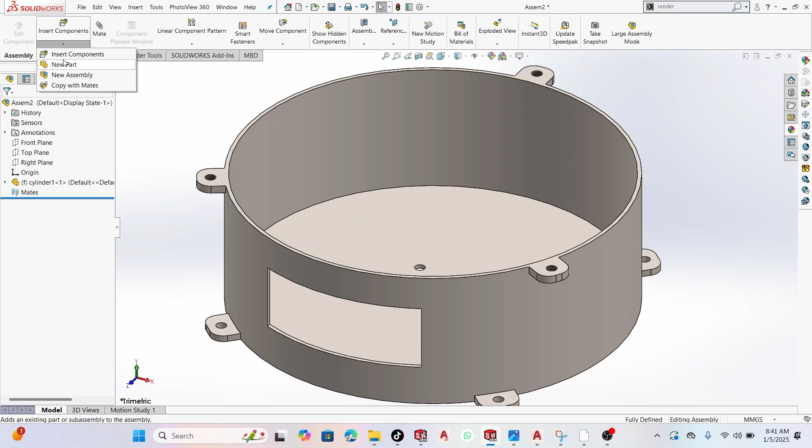Let me start with this one. So this is the bottom piece of the cylinder, and I'll come here still, insert another component.

Let me bring in this bearing. So I'll add a mate. This mate will be concentric mate, and for this case this will also be concentric. However, I have to make sure to put in coincident, just like that.

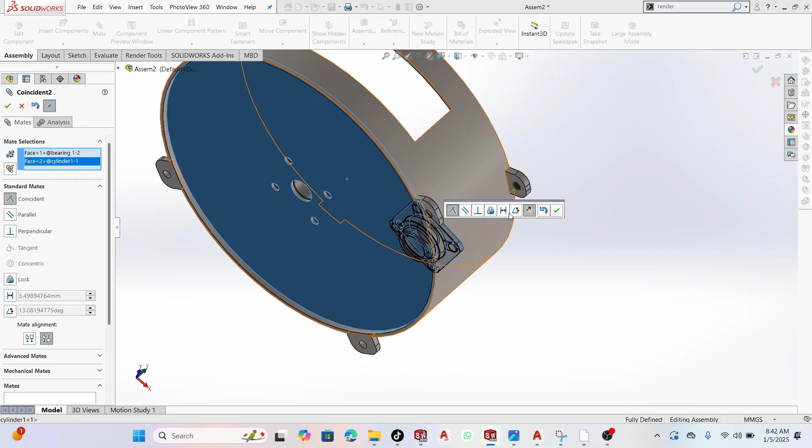Having done this, I'll do the same also and add the bottom bearing. Note I can basically just press Ctrl, then I get a copy of that component. I'll first rotate this and turn it upside down, then repeat the same mates that I applied this time around, going down. So first coincident, then I make this concentric, and finally I'll do the same, so that part like that.

Having done this, next part will be bringing the rotor. So I'll come here and insert the rotor. Remember how these parts have been created in the previous videos, so feel free to roll back and look at them.

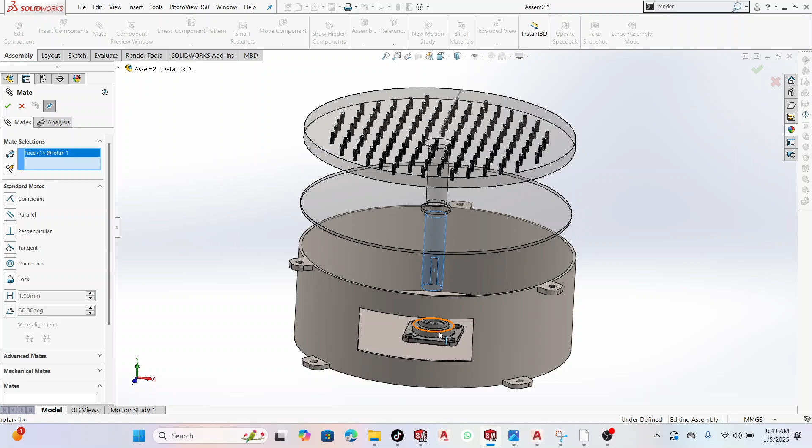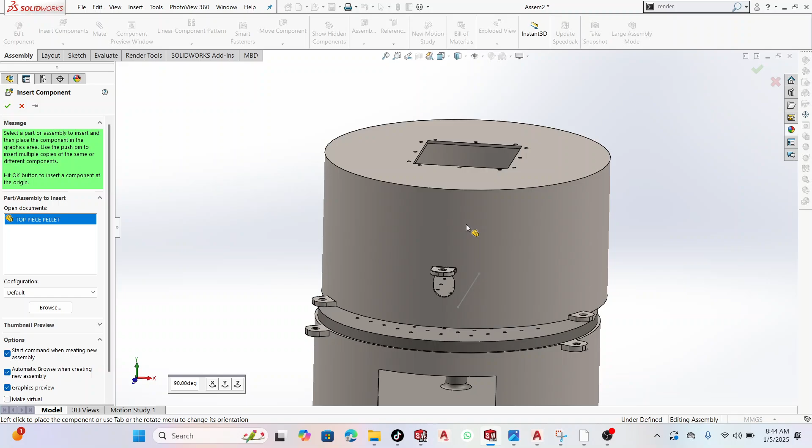Next part is going to be bringing in the top cylinder. This is it. And I'll make sure that this, actually you can first make it concentric to the lower one, just like that.

See, so also do this, and the final part will be making that, and then finished it. I think that's where we are. So far so good, we've moved on well.

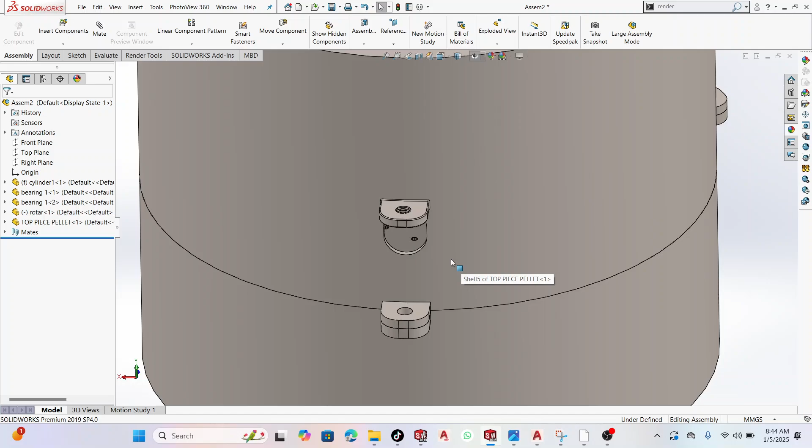So my next part is going to be inserting the rollers. The rollers are made of two different components. You have that.

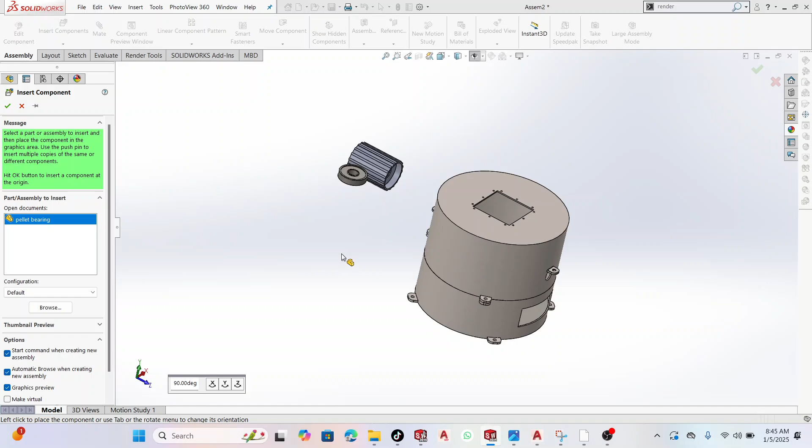We have bearing, I think it's called, it's this one, pellet bearing. Then also have a shaft.

So please follow along as I'm doing this assembly, and your task will be to reproduce the same thing. So this is a pellet shaft.

So what I'm going to do basically is assemble these items so that we have what is called a complete setup.

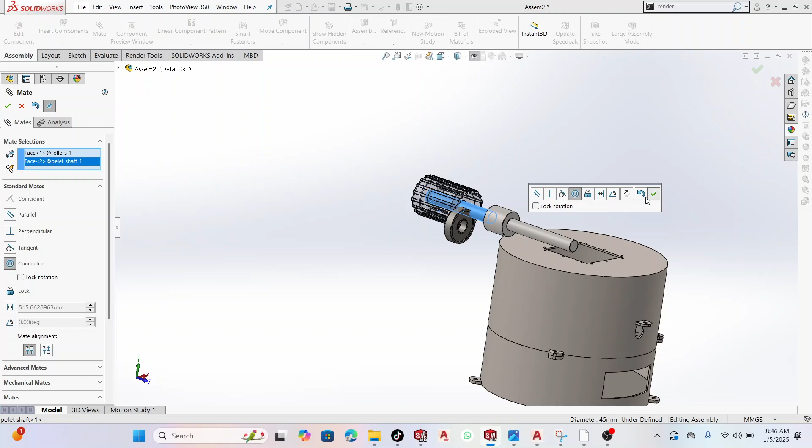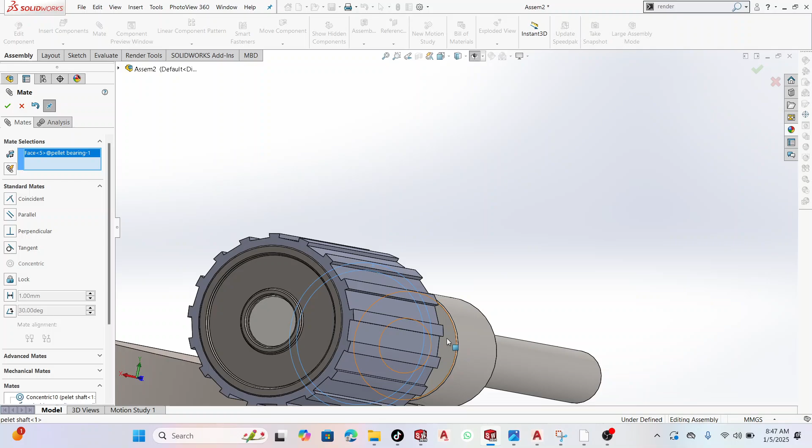We made this also. Then make this and that to be coincident, like that. And to take out this bearing, just press Ctrl. So you do the same. Do that, and also make sure that this face and that face are coincident, and finally make this and that face to be coincident.

So what I'm going to do, to select that, that, then so from here I can copy these items. See, you have so many options, so many options.

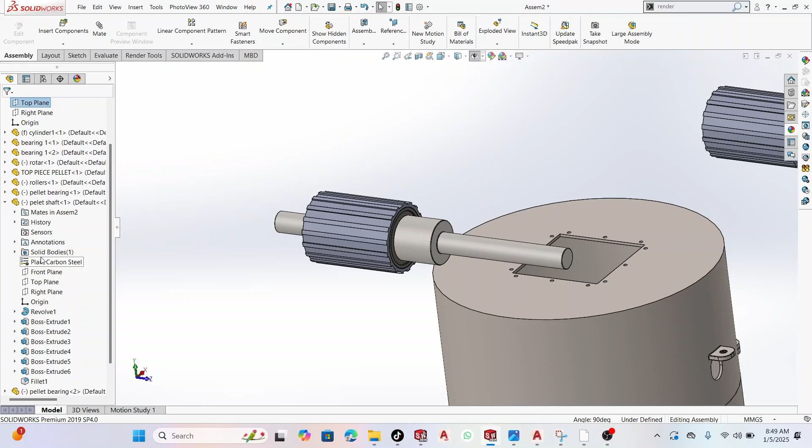No, let me just do this, much as I could also do a mirror. Assuming I go to the shaft, this is it. Yeah, so the front is kind of meaning I would need to create a plane around here, which I don't want to do.

So what I'm going to do, let me just get these pieces very fast, just by dragging. Press Ctrl, then drag, Ctrl, then drag. So I've gotten a copy already, the items that I need.

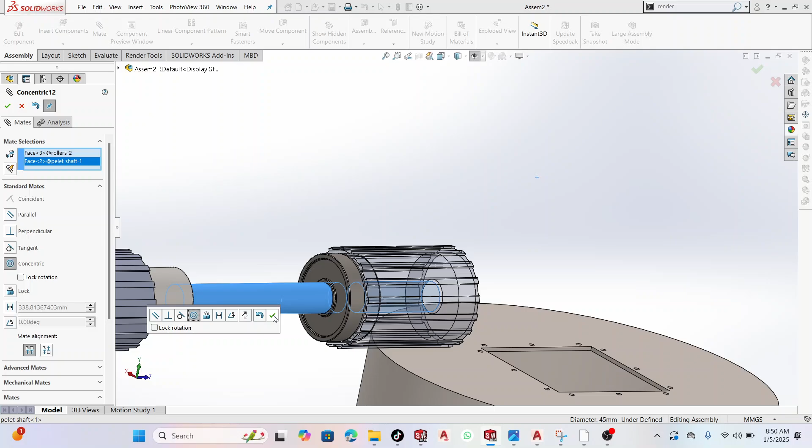So I'll repeat the same thing and do that, concentric, and do this and that. So concentric, need this to be concentric to that. Then before I make the final coincident mate, first do that, then I'll make this to be coincident to that.

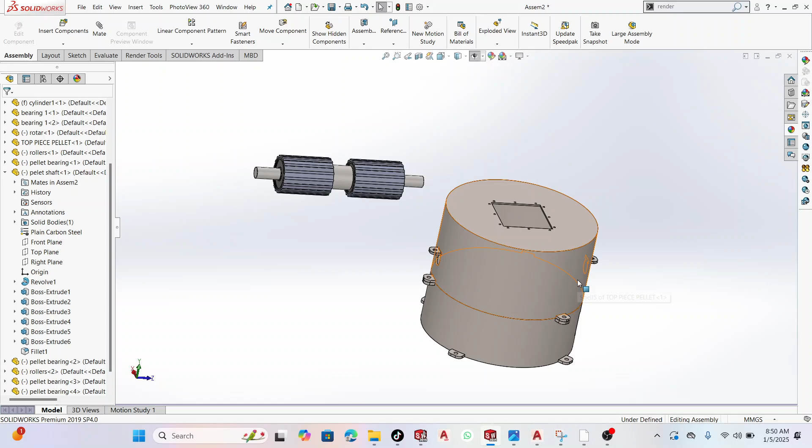Like that, and finally I'll make this and that concentric, then make this and that. So that is the assembly of our milling rollers. However, the other would also be doing a separate pre-assembly so that when you come this side, you just fit it in. So I can drag this in, or just decide to.

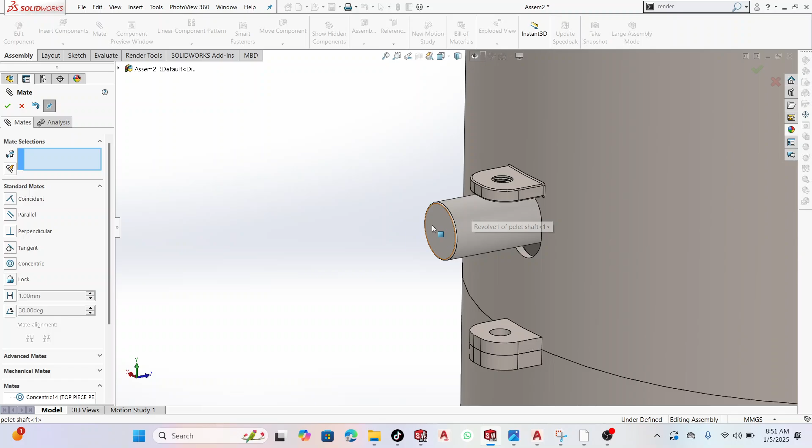So there are two options. You can either make that entry, or the other mate is this. Set it off like that. So that is where we are.

So I'll be putting nuts here. Actually, it will be a bolt. As you tighten it, you'll be adjusting that height. So far so good. Just look at the inside of this. Yeah, this is what you have, what you're having.

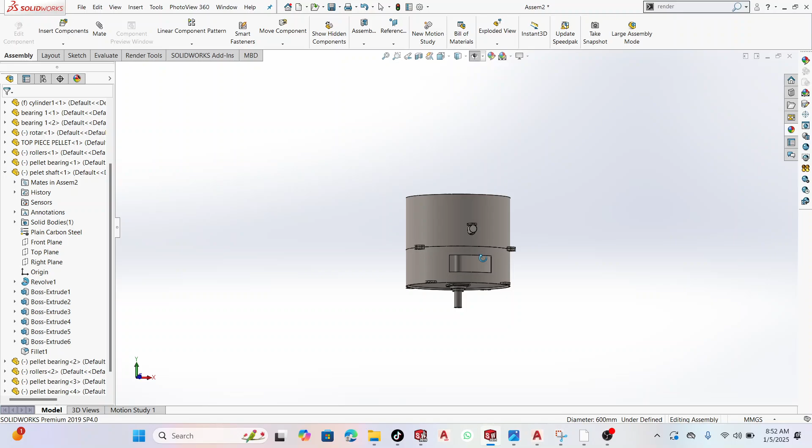So having done this, allow me to bring in the frame. Let's come here, set the frame. This is it.

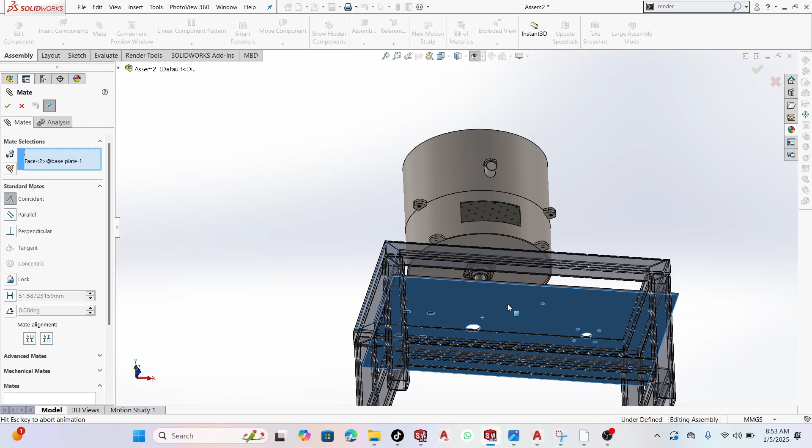So SolidWorks is so beautiful. It has an infinite workspace as long as you don't forget what you're doing. So this is the base plate, and I'll first do a mate for these two. So this is where we are.

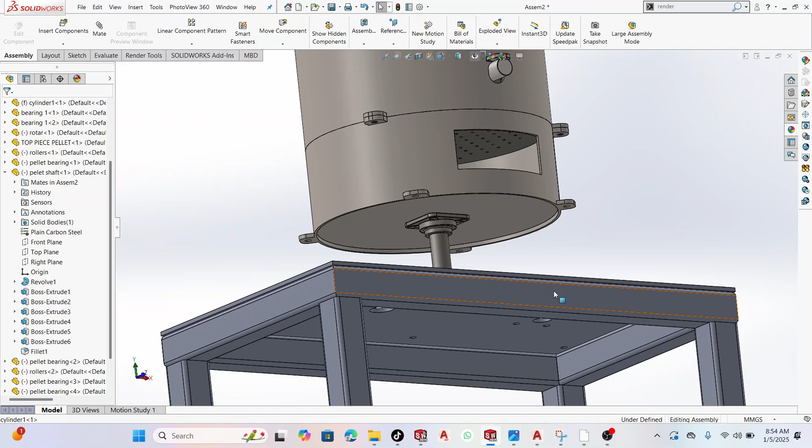So having reached this level, I realize that here this bearing is already here. So what we can do, we can just put it up and down. By that I mean, instead of having it here, I just put it under this. It will be supported already. So come, first delete it. However, that would also break the mate straight away. But yeah, let me just do that for now.

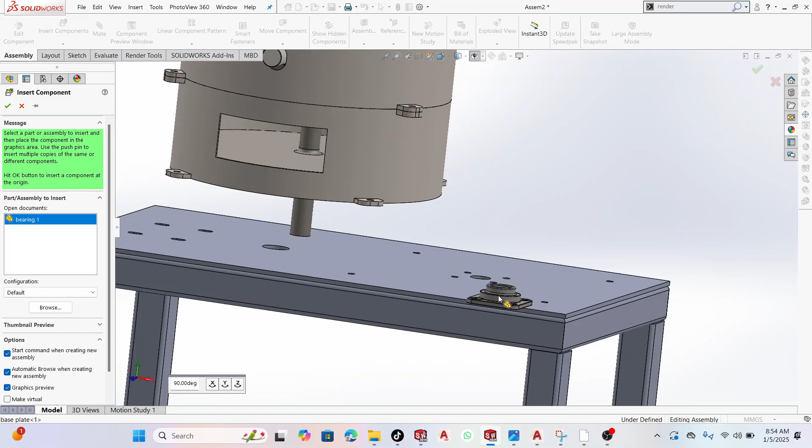Remember, I could also just drag out one piece. So I'm going to do this. I'll make this and that, now I make that coincident to that. And I will bring out this. Concentric.

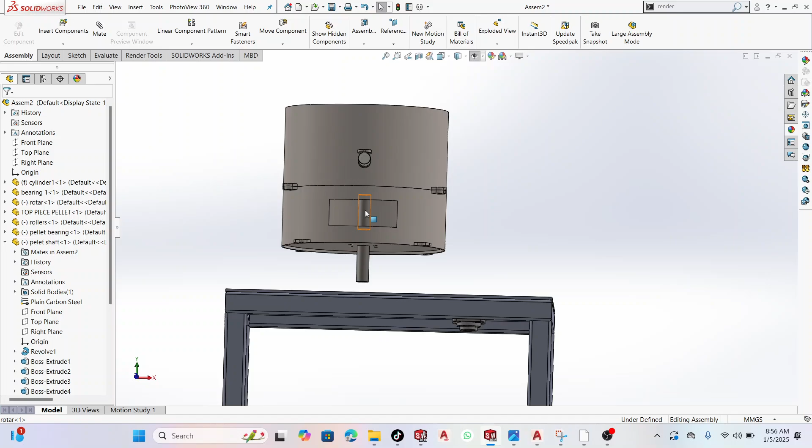Okay, so I need to look at this. Just get one moment. Just look this and that, so that they move together. Just come, that. There we are. So follow this to that. Yeah, so make that command.

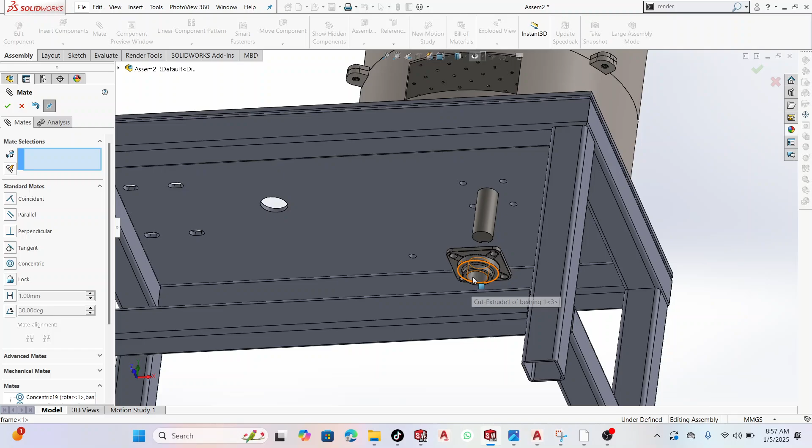Actually, make this and that. Yeah, so there we are. Bearing down, bearing inside, so a piece can freely rotate. Yeah, so these are already locked also to place. So I think so far so good.

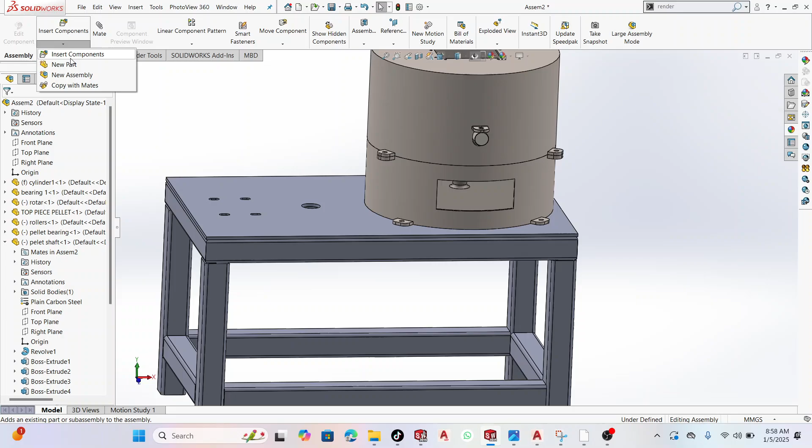Yeah, the next assembly is going to be about the motor and its parts. So I'll come here and insert motor mount. This is it. So please go and watch those parts. The names may be different a bit, but same concept. So there we are.

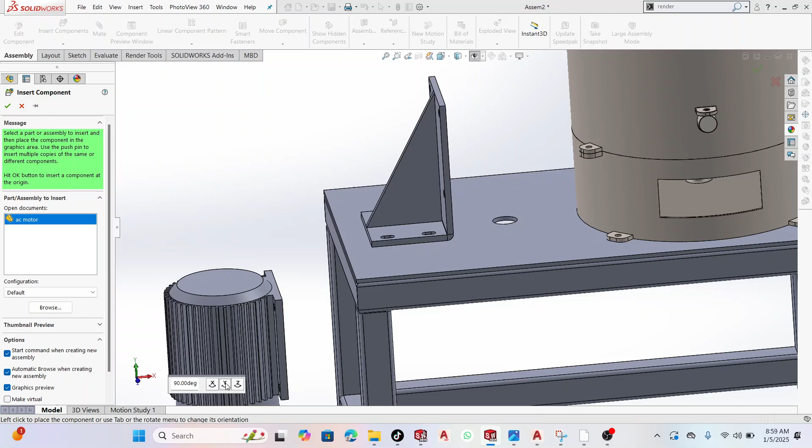Insert the motor also. This is it. Let's change the direction, it faces down. Then carry it there like that. So I want to make it coincident to that. So do this. Yeah, so there we are.

So far we have moved very well. I haven't got any kind of issues.

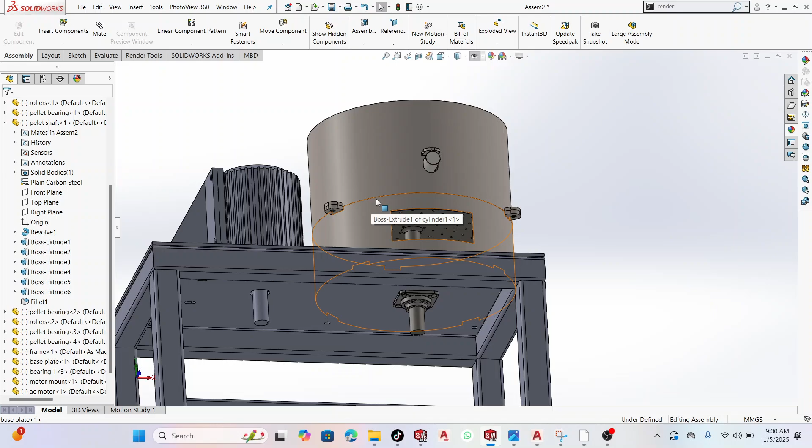So the other part is going to be to open the outlet, then finally I'll do the pulleys.

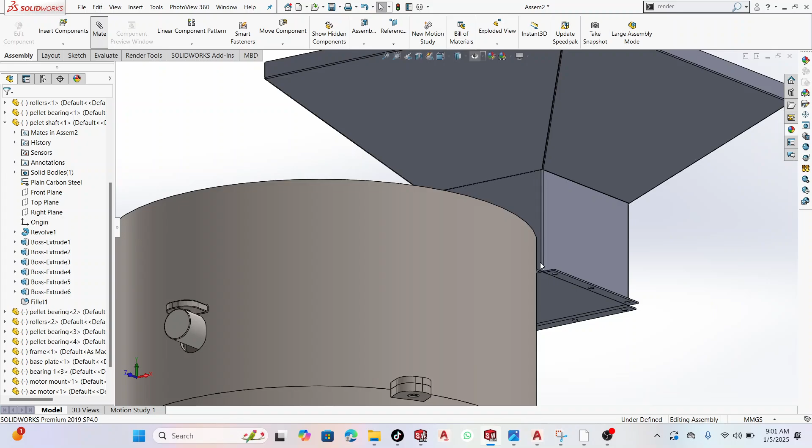Okay, it's going to that. So put the hopper, two steps, going to be the outlet. Yeah, I'm going to put the outlet here.

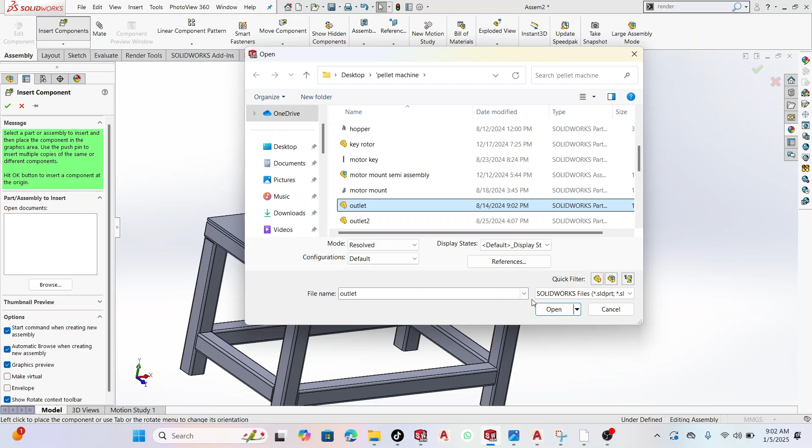So I made a sample of them because I was looking at different styles. So it's this one. Yeah, so remember I've not included it in my tutorial, but given the dimensions.

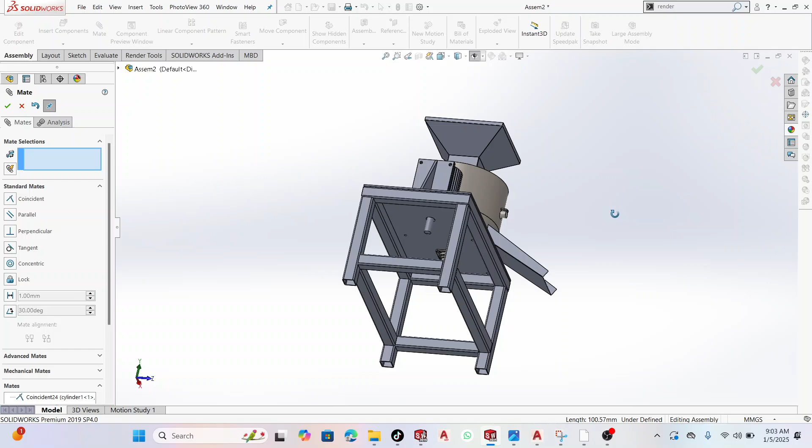First try this, to match that to the vertical. See how it comes out. So basically this will be done by welding. Let me see if I do that and that. It's coming out well. I made this and that.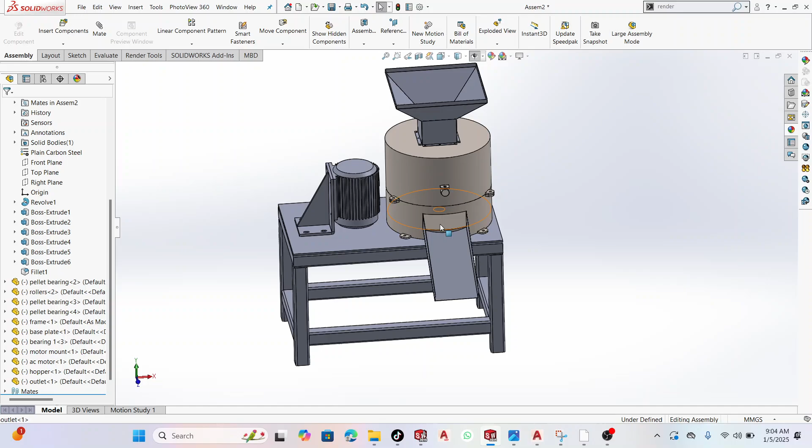So this is a picture. Probably I would have defined it better. So I realized it's lacking a bit, because if you look at this corner, the line is coincident. However, this is kind of, yeah, so regardless, this is normally welded here for the purpose. So for now, I'll keep it at this. However, I'll have to recheck it and see where I could possibly rectify. Thank you so much.

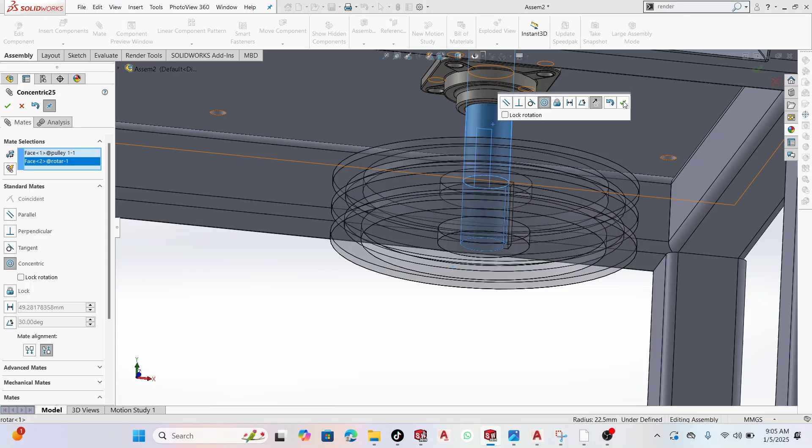So I'll go to the pulleys, and straight away, let me see, have the belt, but pulley one. Yeah, so this one is the one for the motor. First leave it at that, then I'll insert other pulley, pulley 2. This will be the driver.

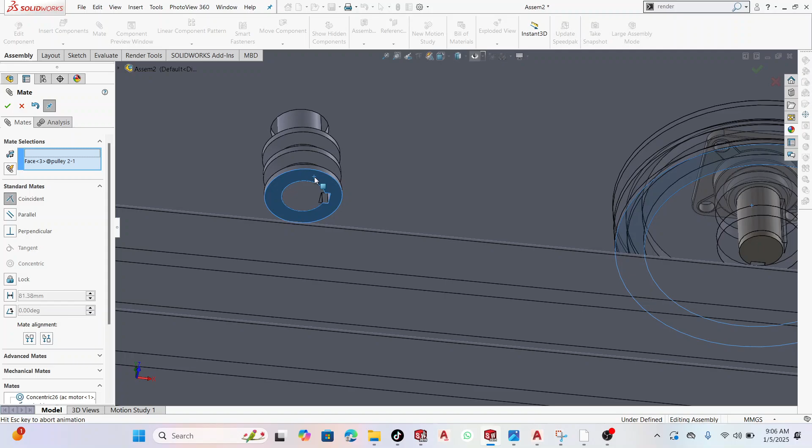So here we are. What I'm going to do is make this face go into that, because they have to be aligned. Yeah, they have to be aligned. Other parts also, for me to do the simulation.

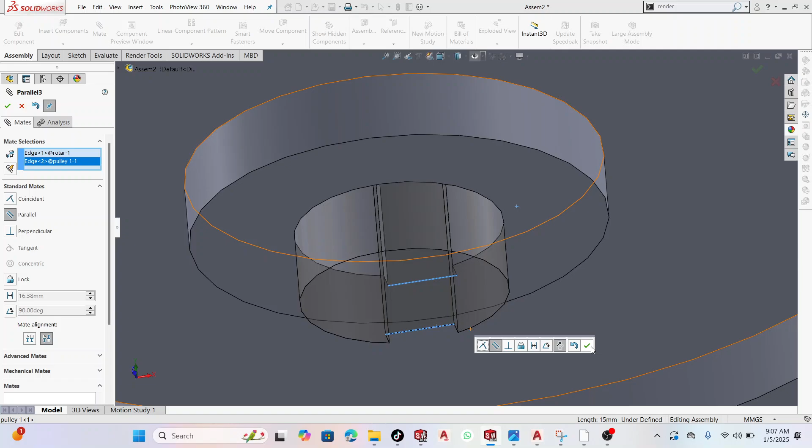I won't first put the keys there, because at the end of the day, this one has no issue. Yes, there's no issue. You can have its lock in there.

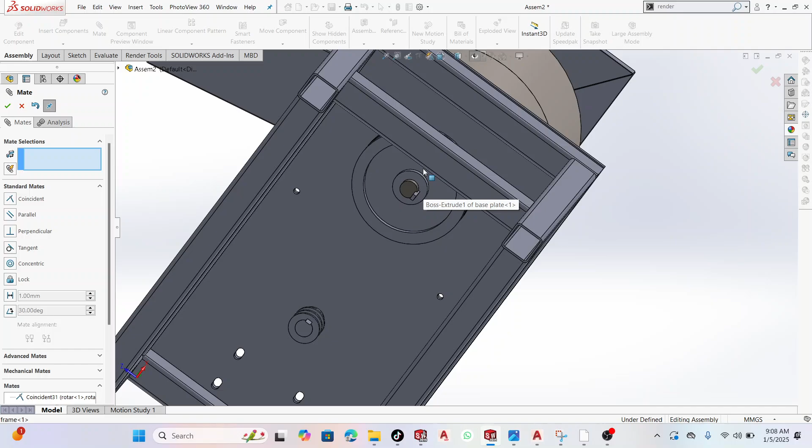Because this will be moving a single object, however, for this case, the reason why I have not locked it as such is because we shall have a key interfering with the movement of the animation. But for that purpose, the key also would come and be inserted in there. So there we are.

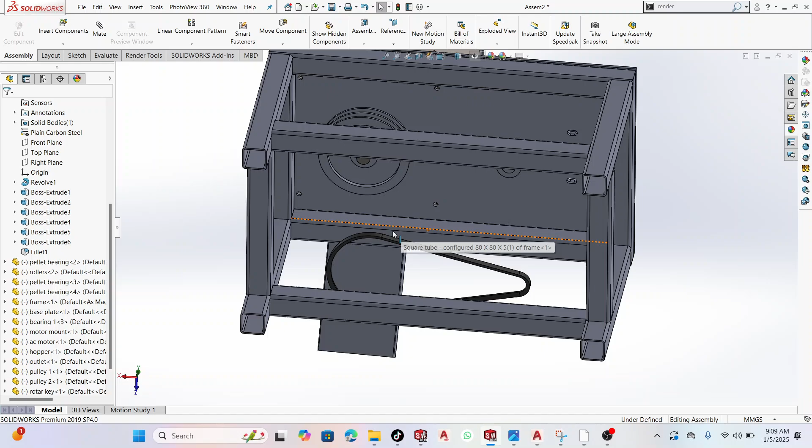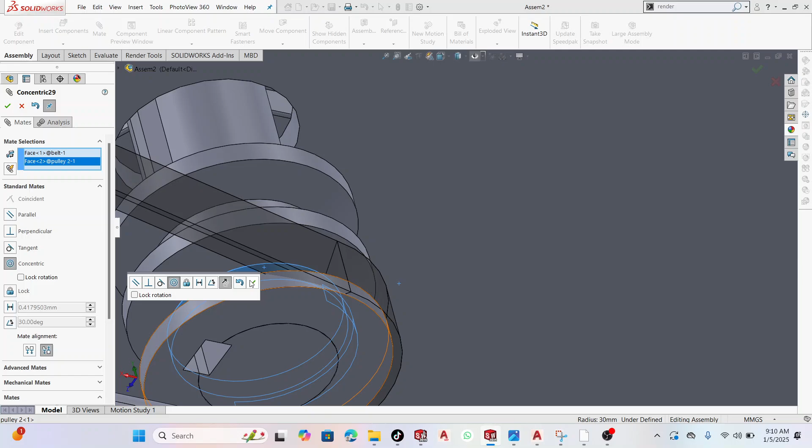Accept. Right. I could... that would come there like that. However, it's still lagging a bit. Let me move it around.

Now that would come with adjustments in the top part of the motor to get the best position. But that is the picture. So, having reached this stage,

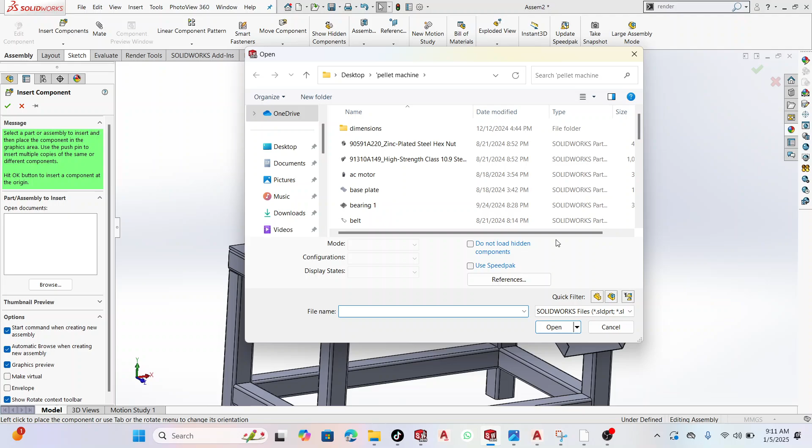I'm going to try to put in the bolts. So in the tools, this is it. The design library can have the toolbox, where you can have at least some basic bolts added. However, if you find that your nuts and bolts are not to the required standard, what you can do is basically download them.

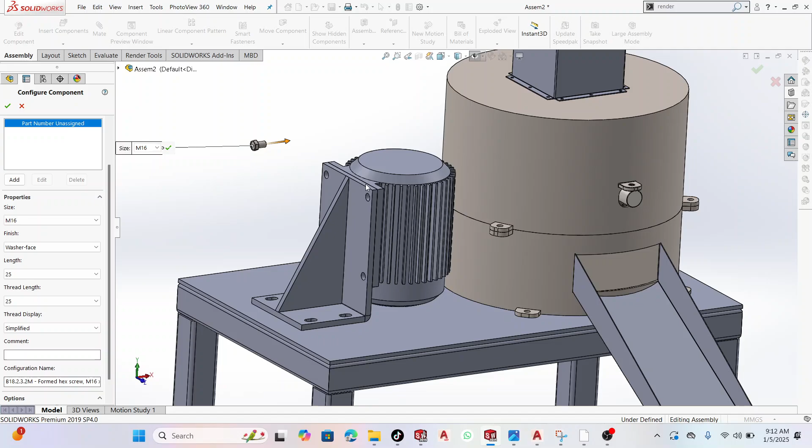You can see simplified threads. You can have M16s, you can have everything here readjusted. So I think these were M16s, and in one of my videos I showed you guys how you can download some of these pieces using McMaster. So I can confirm here very fast on the size. It's 20 mm. So let me see if in my design library I have a bolt that can reach 20 mm. So assuming I select that,

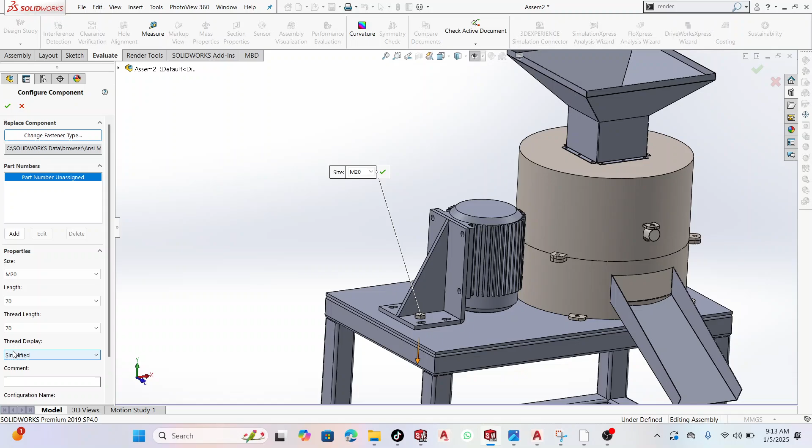I try to bring it there. Yes, I can have M20, and I can have adjustment in the length. Try 70. Let go through. However it's a bit lengthy. Let me... yeah, I think that's fair enough.

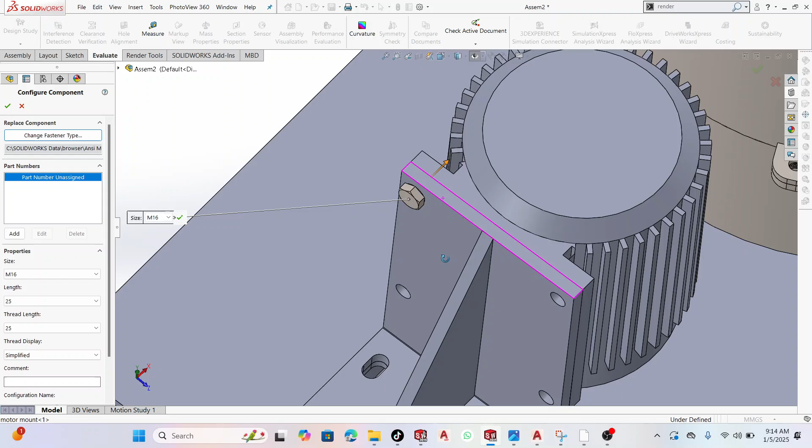So remember, let me first delete it. So I'm going to insert it again. Close this one, this time around. I want it there. So we are going to adjust everything according to that length. See, it has come out.

So let me make it 50, so it doesn't have to touch my motor. And also I can have it schematic like that. So this is a perfect one. And having done that, all I need to do is to just come and keep.

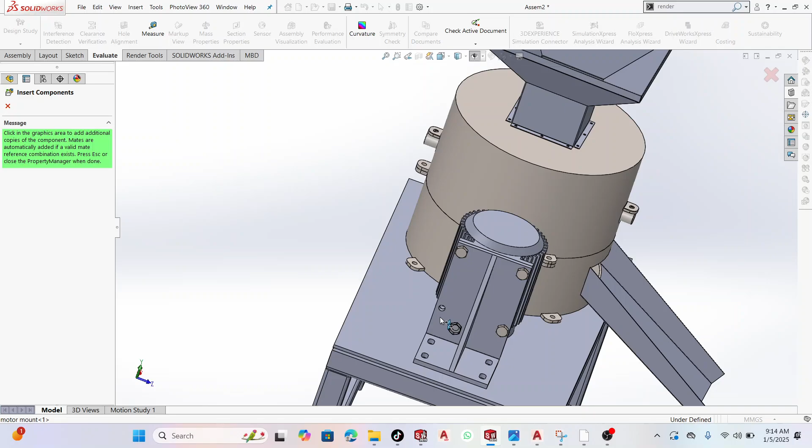So also do the same here. However, these will be slightly longer. So this is it.

Confirming this, these are 16, so I'll do the same thing. Come here, these are 16s. So it's there, however it is far.

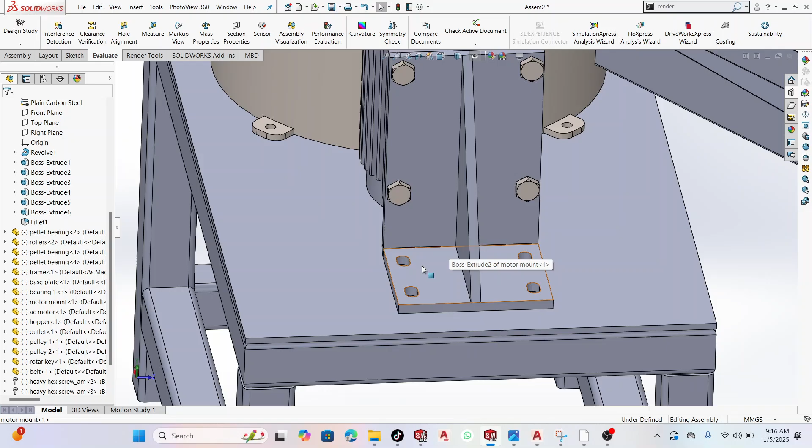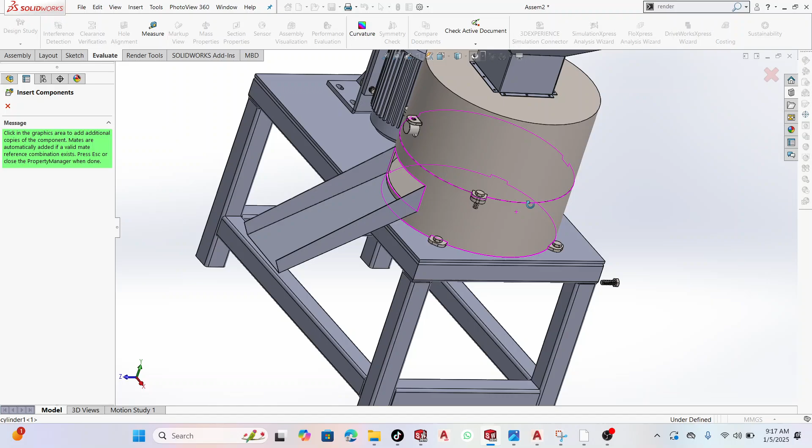So say okay, then I come there, there. I think even this. So everything is coming out just as nice and as simple. I'm positioned to automatically sense the hole, like that.

So you can also add washers. Yeah, so it has been covered very well. Oh, however, I forgot this. So do a control, then control, drag and drop.

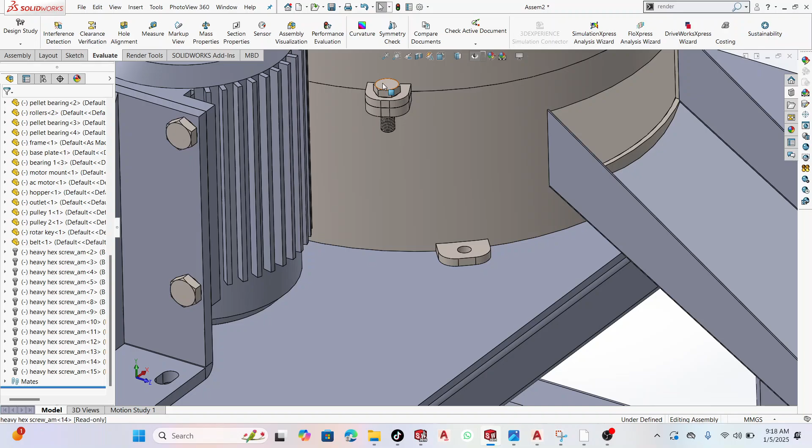Remember for this, they're supposed to be shorter than that because they're adjusting that overall height. Take away this, delete it. So I'm going to fill in the M10s for now, since that's what I had calculated here.

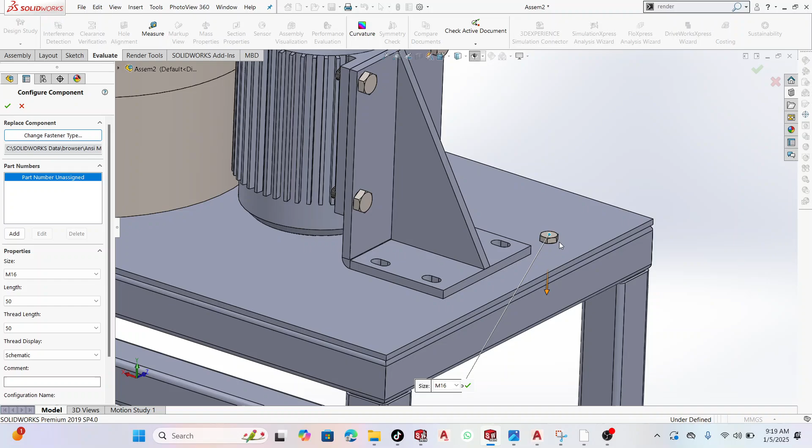The smallest I have is M12. For the concept, I'll show you how it works, but it doesn't differ from what we had before.

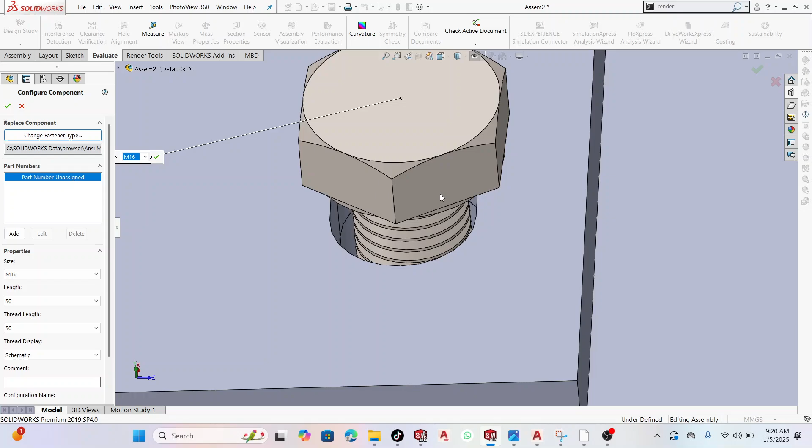It's long enough. Surprisingly, I'm seeing something. It's like this is M20 actually. You know why one side is smaller? But yeah, it is M20. See?

So I want to do M20. I want to leave the thread schematic, that, and I will say okay.

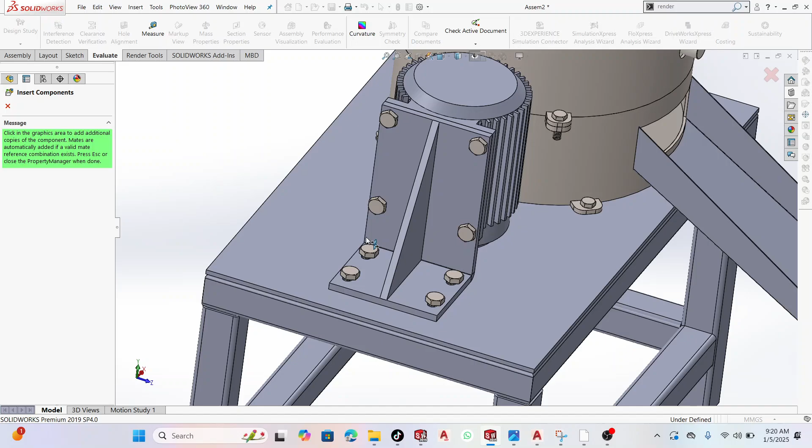So let's come and do the same there and there. Remember, how you're fitting them there will affect the overall view, and they want to be adjustable here. So that's okay. We put in the nuts the same way. Or the other concept would be making an assembly of the nuts, then you come and just start feeding them in.

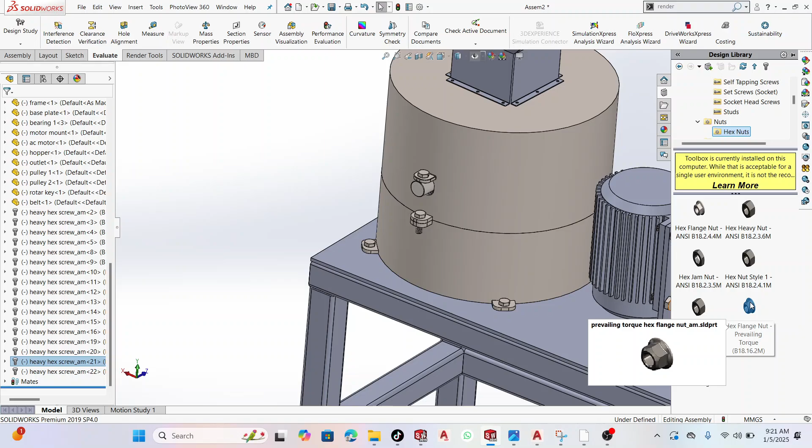So shall go back here, look for nuts. They are here. Let's get something similar to this, remember I have 20. Say okay. So just come. Rectify that. So it aligns like that.

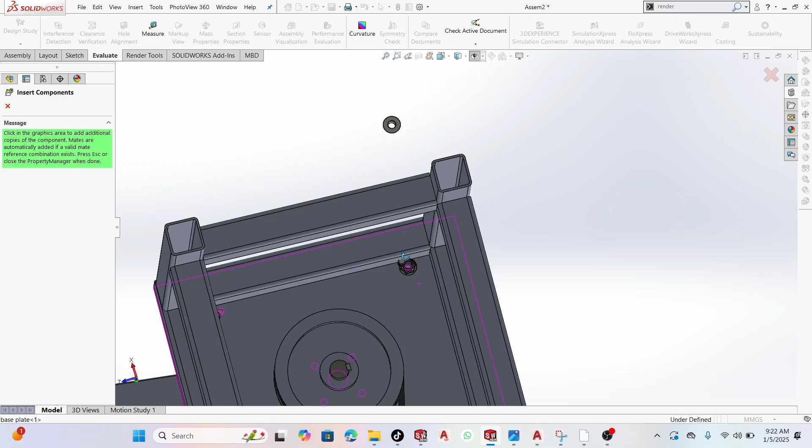Remember, same concept. Same. Oops, so this went astray. Wow.

Realize something. I'm including these nuts so that I first make a proper alignment.

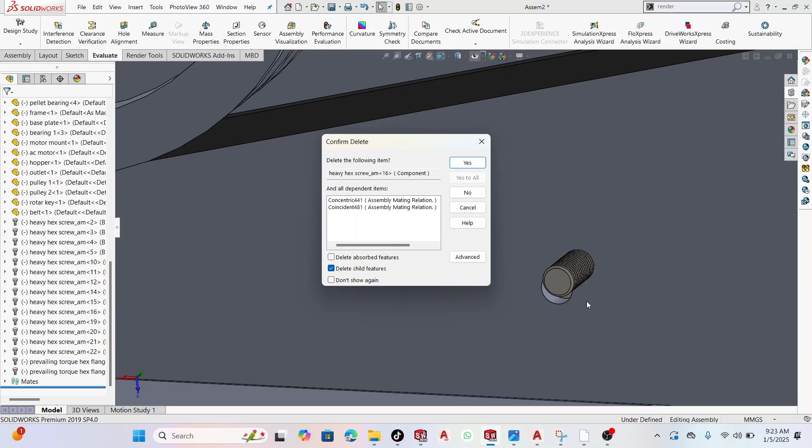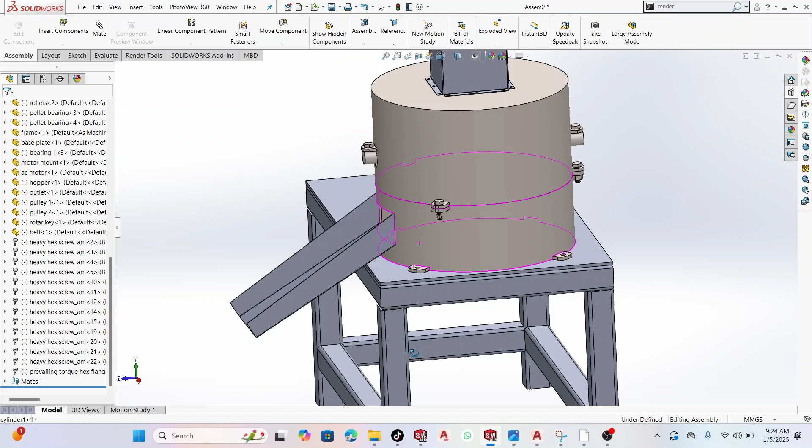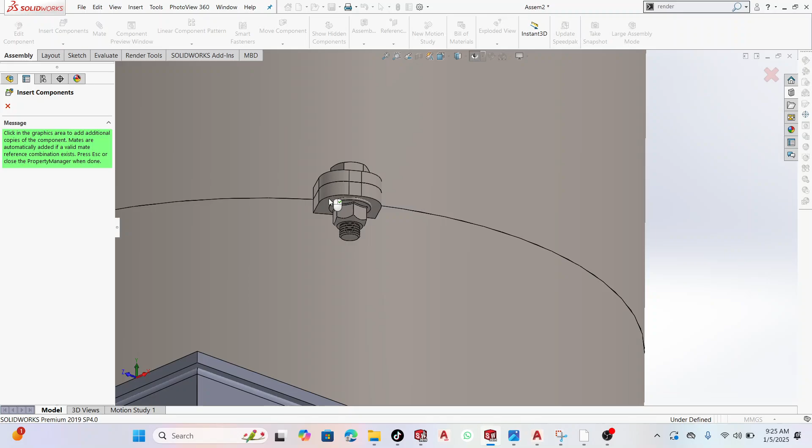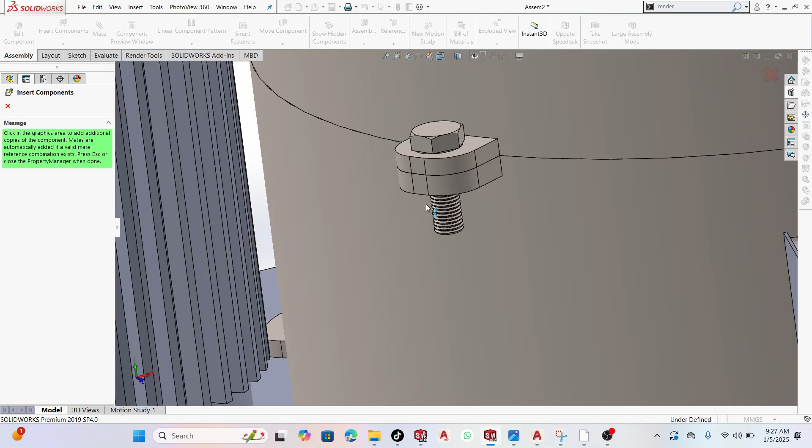So basically I'm trying to align this, so it's a bit misbehaving. Okay, this is there, this is there. That's it.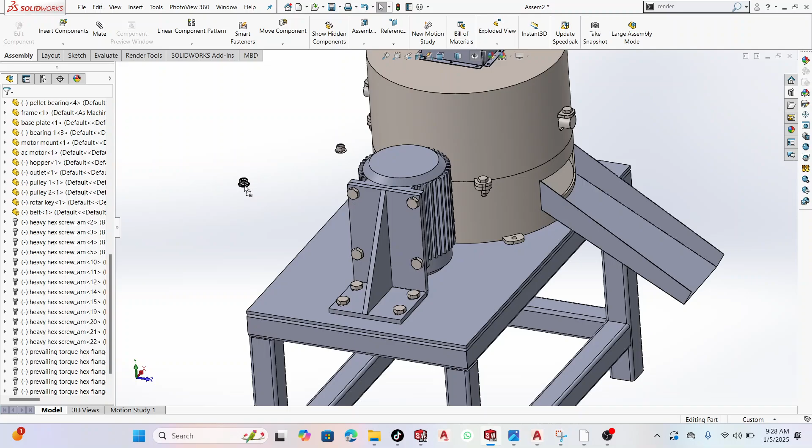Going to go for the lower ones again, the M20s. So still I will do the same thing. I come here, I make this M20, and all I have to do is come closer. Yeah, it's a bit tight. The purpose of the concept, shall leave it at that.

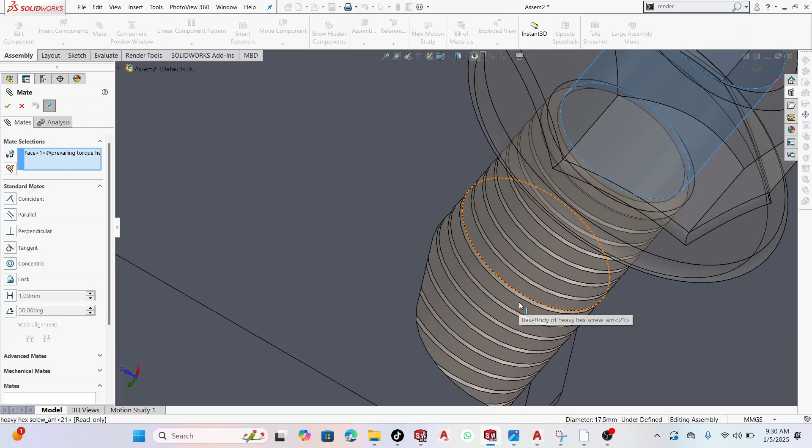So when you see that, it is that alignment tool. The other one will be pressing, then drag. So you know, this can easily do another mate of, say, I'll need...

Let's try this. So let me first hide the frame so that I can easily see what I'm doing.

Okay, so I'll use the design library in this case. Here, select my nut. That is it, M20. When I come, see, just come, position it there. It will align very well, just like that.

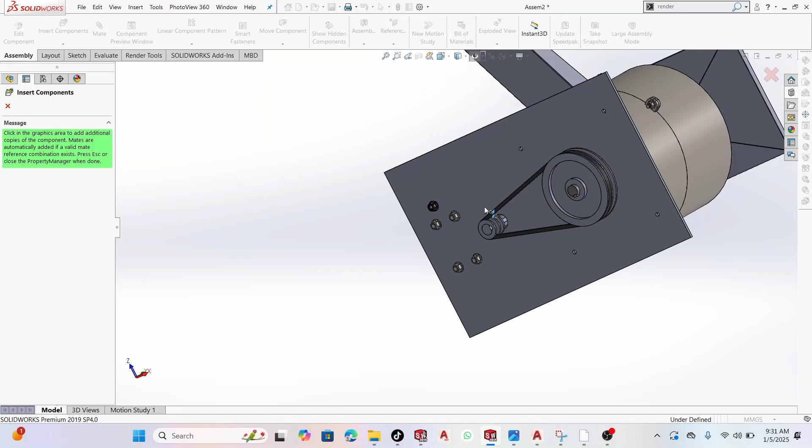So the other still, before I bring back the frame, I think I don't need this guy. First do the screws still. Click and drag. Drag it where I'll see it from.

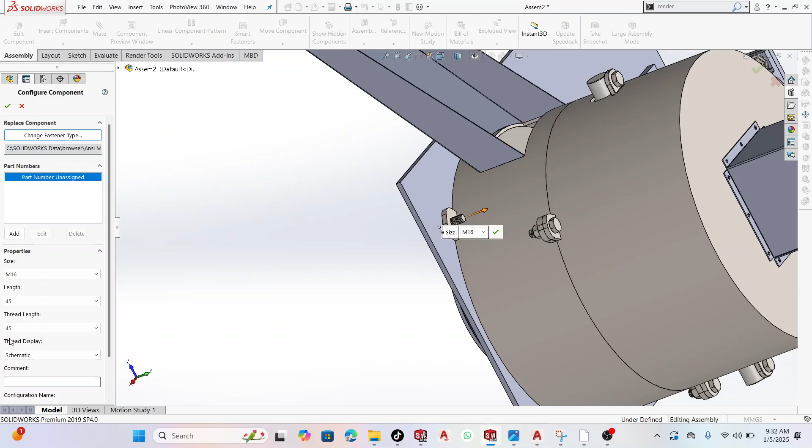So I can decide to make this face up the way it has come out. Turn it to M16. Then can make them schematic, just like that. Can make the threads longer, just like that. And I say okay.

So having done that, all I have to do is to come on to that. They align automatically the moment I move closer to the hole. So that is it.

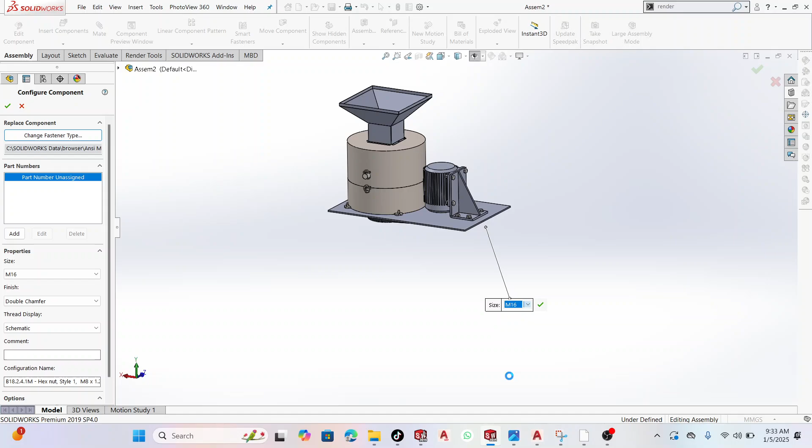This point, I'm going to be inserting the nuts still. Remember, things follow steps. That is M16. So okay.

So to do it, align, move, and it align, move. So it's easy actually. I think you can see it's coming out well.

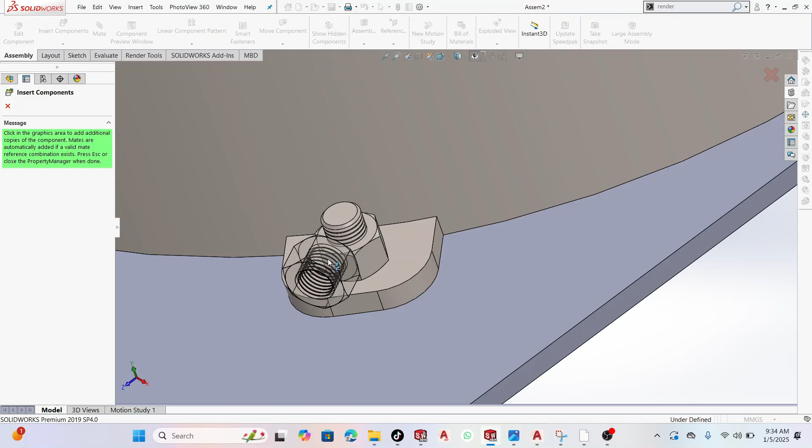So thank you, we've put all our nuts apart from this. So this, I'll first evaluate. So this came out well. However, I have some issue here, I have some misalignment, so hopefully I'll first work on that, then I continue.

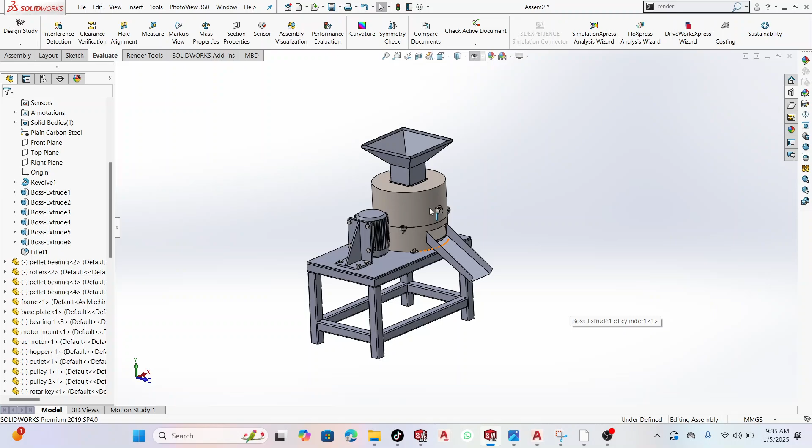So let's bring back the frame. And yeah, this is where we are right now, with only missing part being these bolts and making that alignment properly.